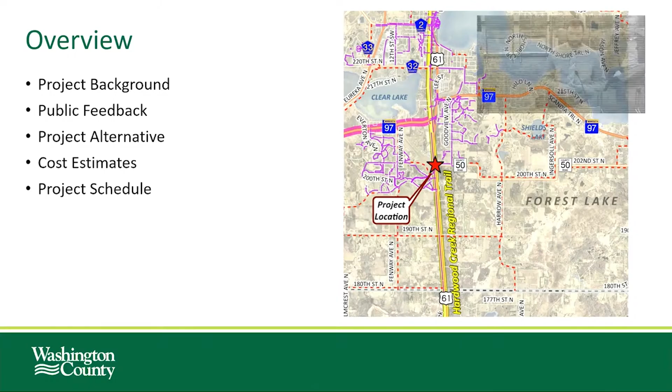On the little star on the map here, County Road 50 is in the southern-ish portion of Forest Lake, just north of Headwaters Parkway and north of the new environmental center there. So that's the intersection at hand.

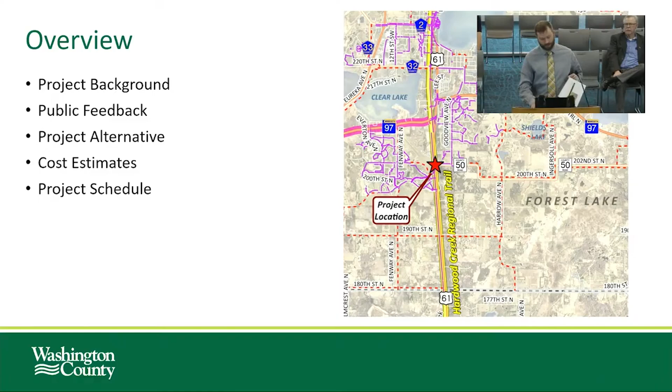Some quick background: Trunk Highway 61 is the main north-south highway here with a 50-mile-an-hour speed limit and high traffic volumes. The intersection is currently side street stop controlled, which can make access onto 61 very difficult, especially for vehicles wishing to make a left onto 61. There's an existing rectangular rapid flashing beacon at the intersection to help facilitate pedestrian crossings, although there's been a history of crashes involving both pedestrians and vehicles when those lights are activated.

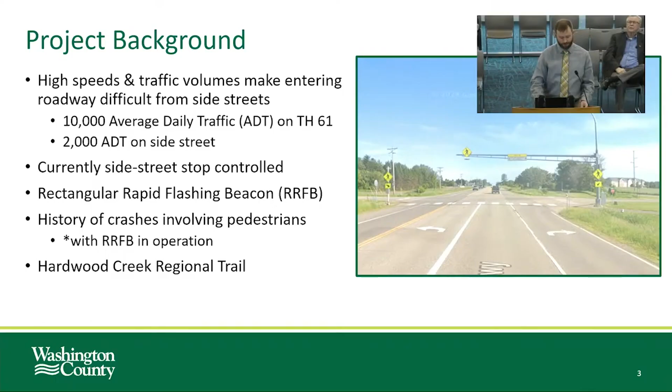The Hardwood Creek Regional Trail is along the west side of the intersection, and that's the county's most visited and well-used regional trail. So it's really a three-way cooperative project with the Minnesota Department of Transportation, City of Forest Lake, and Washington County. As we mentioned last time, we've been busy seeking outside funding opportunities to make these intersections possible. To date, we've secured 2 grants and are working on a 3rd application. Previously, I noted we secured $2.67 million between some regional solicitation funding as well as through MnDOT's local partnership program grant application for improvements on 61.

The 3rd item we're currently seeking is an additional $2 million through the Community Project Funding Program through Congressman Stauber's office. That's the 3rd chunk we're really striving to hopefully secure. Quick project goals: reducing frequency and severity of crashes, providing safe, clear, and accessible crossings for multimodal users, and maintaining acceptable vehicular operations well into the future.

Quick refresher on public engagement: we held our first open house in July and second in September of 2025 down at the Headwaters Parkway Service Center. We had good turnout and received a lot of good feedback both in person and online. What we learned is that 61 is a barrier between the east and west corridors at this intersection. The first open house focused on existing conditions. We heard a lot about the difficulty making left turns, how dangerous pedestrian crossings are even with that rectangular rapid flashing beacon currently there, as well as a lot of excitement for improvements at this intersection.

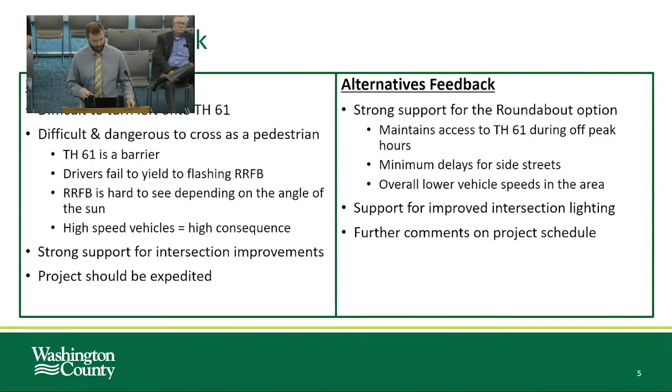In September, we brought forward 2 alternatives between a signal and a roundabout to solicit more public feedback. During this engagement, we heard a lot of support for the roundabout, largely due to its ability to maintain side street access onto 61 during off-peak hours, as well as minimizing vehicle speeds through that intersection for all users, not just the folks that hit those red lights at the signals. So that's what I have for background and public feedback. Any questions from City Council on those two background items?

Hearing none, so with the roundabout addressing the needs of this intersection and being largely supported by the community, the project team developed several options for the roundabout at this intersection.

On the screen here are two same but different layouts. The difference is how that roundabout is centered or structured within the existing trunk right of way. On the left image, the roundabout is shifted to the east, putting part of the circulatory partially outside MnDOT's right of way. But this allows proper approach lengths on the west side of the intersection. The image on the right shifts the roundabout back to center within the MnDOT right of way, which, to maintain appropriate approach lengths, shifts Forest Road to the west slightly as well.

The option on the left results in shorter turn lanes for the future potential public works site on the south side, on the east side of the intersection. It also causes a couple complications with some existing city utilities out there.

Neither of these alternatives are perfect, but one benefit of centering the roundabout is it provides more flexibility to shift the roundabout location north and south to avoid the sanitary sewer crossing, which is key because of the existing grades and size. From the city standpoint, we'd prefer not to impact or realign that. On the east option, the left image, shifting it north is possible, but causes a few more right-of-way impacts, particularly to the northeast corner.

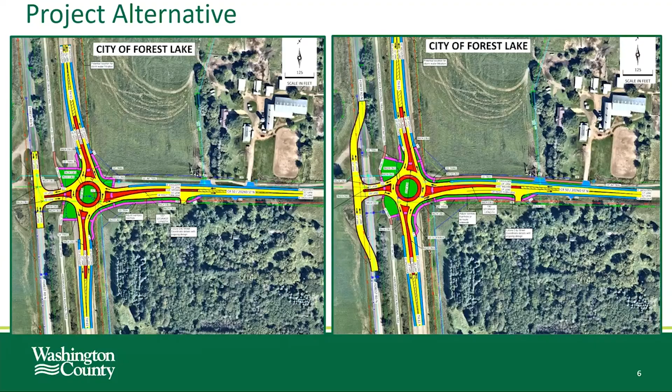Right, the cost for putting the road in, but how does that compare, because we're not spending money on the sewer line underneath the road. If we went with the option on the left, we've got to spend money on the sewer line. Which one's the... Yep, no, I forgot to address that part.

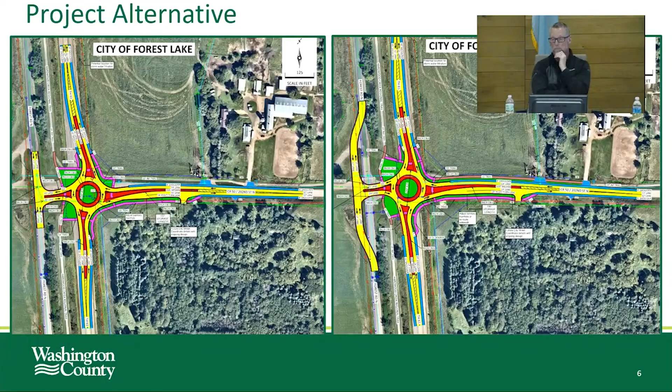So the one on the left with the roundabout shifted to the east, it's hard to see here, but the existing sewer line runs right basically on the south side of that red circle. So it's possible to shift that roundabout north in this scenario, but it creates more right-of-way need in that northeast quadrant. Whereas on the right, when you shift it to the center, you bring the mass of the roundabout towards the center of the right-of-way, so shifting it north to avoid those impacts is less right-of-way takings and less right-of-way impacts. So there's right-of-way needs to reduce or eliminate the sewer crossing.

MnDOT's guidance here has been the city doesn't need to relocate the utilities, assuming you're accepting the risk, and if there's a break or you need to fix it, the repair cost would be on the city, much like it would be today too. Mayor, City Council, just so you're aware, both the sanitary sewer and the water main that run through this and underneath this trunk highway are in existing casing currently. We will probably have to extend that casing in both scenarios, just to make sure we're outside the footprint of the roadway. That's a requirement MnDOT has always required. Plus, if something were to be bad with the pipe, then we can go fix it trenchless, right? We can get in and out of that casing on both sides with pits if we really, really had to.

So with that being said, the concept on the right takes the center of the roundabout north of the sanitary sewer, but then we still have that water main. We'd have some minor relocation to do too. But the thing about that sanitary sewer, we consider that trunk line. That's a 24-inch sewer line that's at minimum grade. To relocate that, we're chasing that a lot longer than this project, right? Because the grade is less than 0.5%.

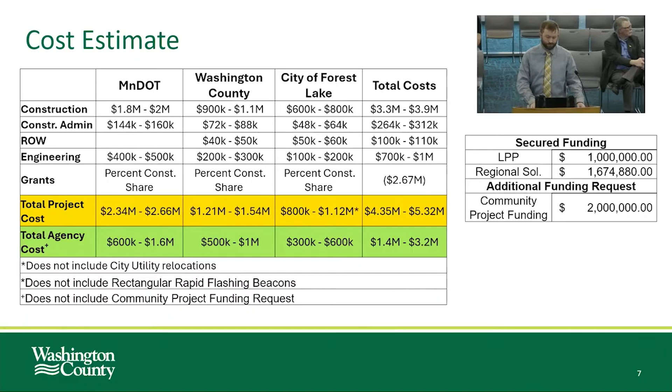Does staff have a recommendation yet on this part of it?

I was just trying to add up the math with how many times that other one got hit. I'm halfway through, from 22 up until now, I haven't finished yet, I have 8 different times so far, and about $30,000 worth of damage. And that's not including Public Works when they go out and fix it. This is just contractor work when it gets into full poles knocked down or electrical work.

So is it $30,000 per occurrence or total? Total, so it's about between $2,500 and $3,300 per time when one gets knocked down and they have to rewire and set a pole. There's one that's about $9,000, I think that's when we couldn't just put the pole that got knocked down back up. I think we had to buy a whole new pole.

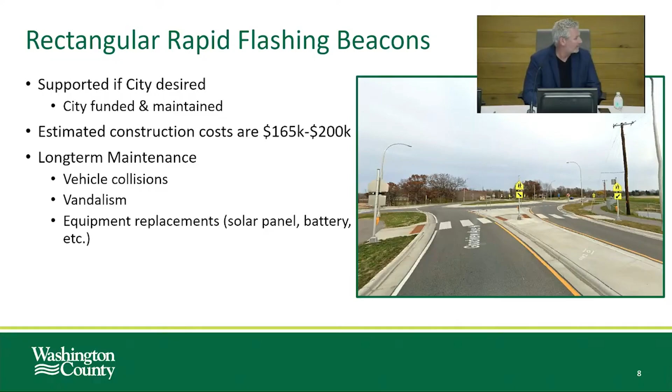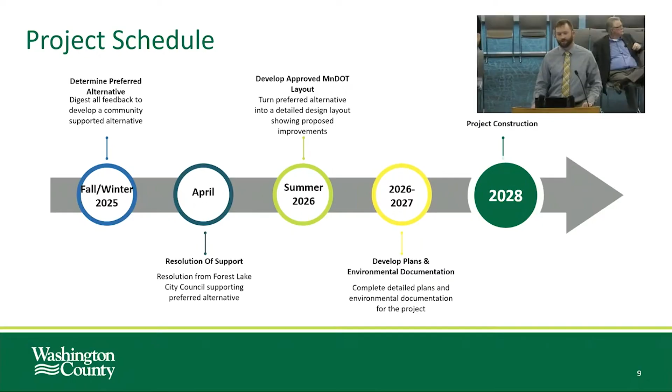Okay, real quick, just a reminder on the project schedule. Tonight, no action, but really what we're looking for is just a resolution of support for the project. As Ryan Goodman pointed out, it allows us to move forward with this roundabout design, but it doesn't necessarily lock in - we don't need to lock in these RRFBs right now. Some of the finer details can still get worked out over the next year and a half, but it allows us to take that next step forward, knowing all agencies are on the same page in terms of our alternatives.

Hopefully this summer we'll develop a level 2 layout, basically a 60% design on a big piece of paper you've probably seen before. Then we'd work through final plan development through 2026 and 2027. This is federally funded, so we have a lengthy environmental process that takes 6 to 8 months for some agencies to get back to us with their reviews - so there's a timeline constraint there. But we've got some time here for planned construction in 2028.

So otherwise, that was it - that's all I had. So I guess any questions, thoughts, departing words for us to take back?

Maybe highlight some of the positives - cost, maybe safety isn't as much of a concern on these roundabouts as a traditional intersection with signals - that led us to get here. I'm trying to remember that conversation, but if there are some highlights you could point out as to why. I agree with Councilmember Miller that it looks intimidating with all those crossings, but clearly the county has - this is the plan. You're doing more and more roundabouts than signaled intersections, correct?

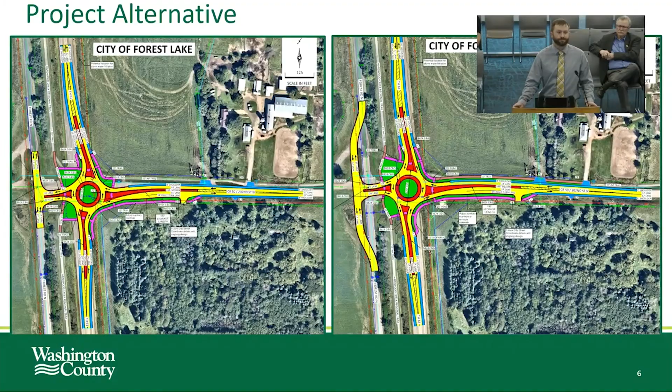Yeah, well, it's definitely needed. I mean, with all the housing that's coming in there and the developing we're planning on, it just scares me.

Any other questions or thoughts? Councilmember Miller, just to expand on that, the county just solicited proposals for the corridor study for County Road 50. So there'll be a lot of that kind of stuff looked at as part of that study with the growth in that area. Okay, thank you.

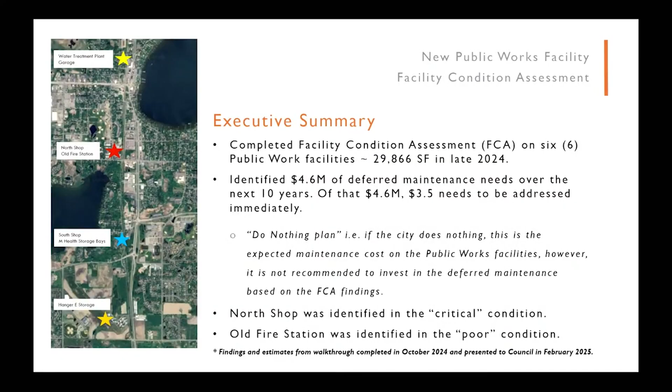Thanks, Jonathan. Mayor, council members, thanks for having me tonight. Just to give you a high-level overview, these were the findings from the facility condition assessment done in late 2024, and then approximately a year ago I had a working session and ultimate follow-up on the findings from that study last February. As you know, the Public Works facility is spread out currently across 6 different facilities at 4 different locations. Ultimately, through the do-nothing plan or deferred maintenance plan, there was over 4.6 million in deferred maintenance needs.

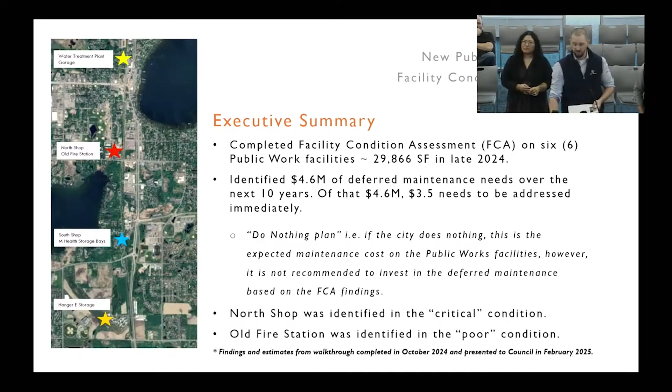When we talk about a facility condition index or how we score these, this isn't an index developed by KA - this is a nationally recognized index that you grade facilities with, the deferred maintenance costs over the replacement costs of a given facility.

Here's a breakdown of what that 4.6 million looked like across all of those projects. Ultimately, when you see in the red there for the North Shop and the old fire department, which makes up the bulk of your square footage of your existing facilities today, you're in both critical and poor conditions, which then is a recommendation to divest.

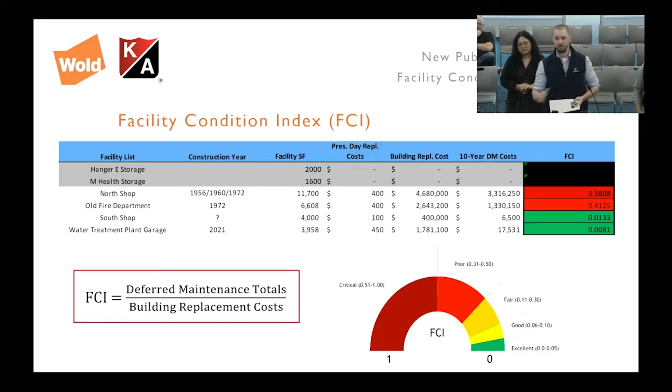It's easier to replace the facility than it is to try to go in and do the repairs that are needed. It's also important to note that in a facility condition assessment, you're not looking at adequacy - you're looking for that like-for-like replacement within those facilities.

So that is a high-level recap of the facility condition assessment, unless there's questions. Otherwise, I'm going to give it back to Wold, and we're going to talk through space programming.

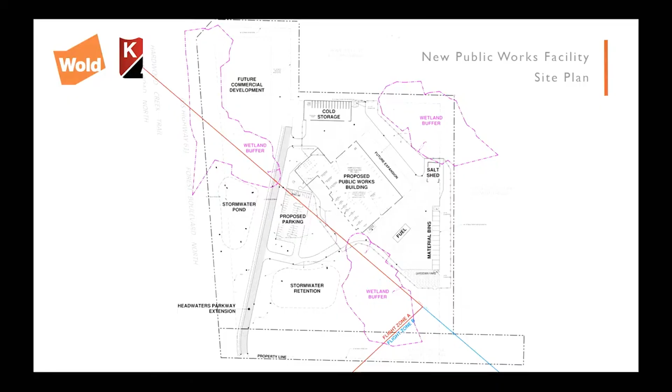So I'll do a quick run through of the progress and where we've landed with SD. Obviously we are just at the first stage of design, so none of this is set in stone. It's all malleable, but with the feedback of the core group, this is kind of where we're at this point.

From a site plan perspective, here's the new proposed public works facility. We'll go more in depth on the floor plan in the next couple slides, but we are contending with, if you remember, the airport flight zone restriction. That's this red triangle here. Essentially we cannot locate the building in that footprint, so we are trying to stay outside of that zone.

Another restriction around the site are the wetlands that exist there today, shown dashed in this magenta color. Working around those, we've established the Headwaters Parkway extension on the west side of the site. To maximize efficiency, we're looking at splitting the stormwater retention, sized for what we're calling the future commercial development at the northwest corner. We've left a zone available there, and also a future connection up to the road to the north.

Off of Headwaters Parkway, we've got the proposed parking lot for both public and staff vehicles. Circulating into the site on the north end, we've got the cold storage building. We've dedicated a zone for future expansion. Obviously that's left unbuilt for now, but just to make sure we're not locking you in long-term to something that's not usable or can't be modified in the future.

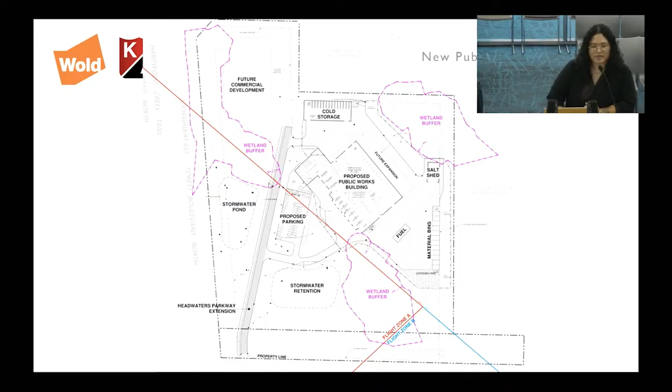As we dive in closer to the site plan, I've got zoomed in views for each of these, but overall we're looking at the north side of the building being our main office area, knowing that has more prominence, closer to the street, trying to give an attractive view for those driving by. Further south along the front, we've got the division workshops and maintenance bays, and the largest portion of the building is the vehicle storage, our garage and vehicle parking component. We're also looking at a mezzanine space for added mechanical and storage over a portion of the offices off the mechanics bay and over a portion of the parking spaces.

The office area has two separate entries planned: a public entry on the northwest side of the building, and a staff entry for ease of access as they come in daily. Off of the main lobby, we are looking at a training room. Feedback from our steering committee prioritized that as a public component or amenity that other city staff or the public could utilize. There is a functional component too, making sure it's usable as a break room for public works staff, accessible conveniently from their primary work area.

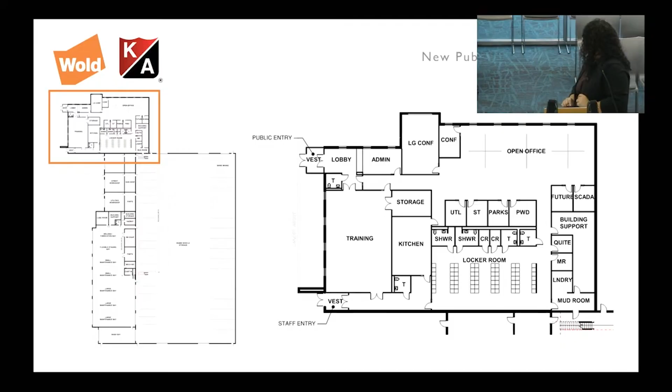And then what is the total square footage of this part of the building? I don't have that, do you have that? The office area is around 11,000 square feet.

Yeah, and I'll say, from that 11,000 square feet, I think some folks from the steering committee have seen this, that over the course of time we've actually cut quite a bit out of this space. We originally had a separate training room and a lunchroom and break room space too, and there are other areas where we've trimmed down, in that locker room area as well. But I'd say sharing that kind of cafeteria and training room space was a big shift that got us down quite a bit in terms of square footage. So I wouldn't necessarily go through all the ins and outs of that, but it's probably important to know that, with the support of the steering committee and staff, we're able to continue to look at ways to get this done efficiently. Thanks.

Mr. Mayor, yeah, Kevin, City Council. So I know we don't have any women staff right now, no women employees right now in Public Works. How would you, in the future, let's say we have all of a sudden 3 or 4 ladies, how would we divide those showers in that locker room to accommodate them?

I guess we don't often see that they're necessarily assigned. Those are all individual occupant rooms, so as people need them, if you need to jump in the shower, you would just go in whichever one is open or available. Sure, but if you're changing your clothes, are you standing in the shower or are you standing out in the locker room? Oh, we've got changing rooms included in here, so there's 2 shower rooms, 2 changing rooms, which is essentially just a bench, a glorified closet space essentially, and then a couple of toilet rooms.

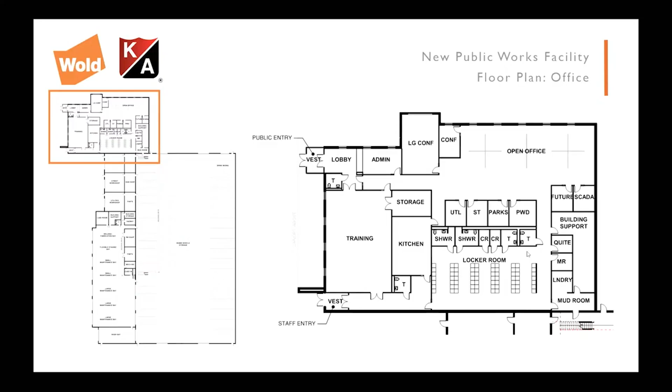Yeah, maybe, I don't know if we can zoom in on that. Is this a PowerPoint or a PDF? I can see them fine. Just to note, if you look at above the R, that's where the actual shower is. And then the rest of that space is like, this is a single-use space, so there's a large area to change. There's still a bathroom and a toilet.

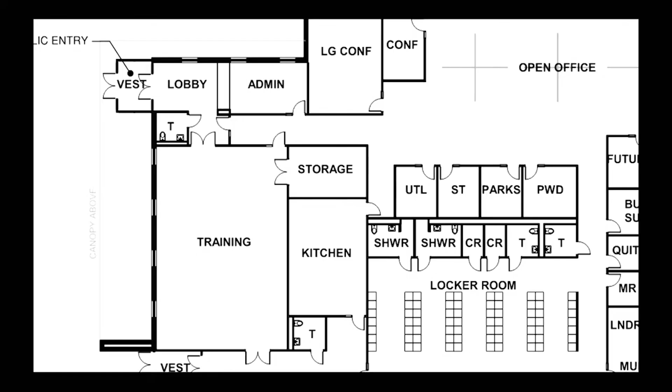So these are all individual use spaces. And that's sort of the benefit of doing it this way - people store their stuff in their individual lockers out there, but they're really changing, showering, going to the bathroom in those single-use spaces.

I've seen it where oftentimes females feel more comfortable if something's assigned, and there's nothing stopping Public Works from saying this left one is for females only. I'd say there's still adequate space for the men to use the rest of those facilities without feeling like they're stacking up on each other.

So as of right now, it's meant to be flexible for those changes in staff. I think 25, 30, 35, 40 years ago, Public Works employees would come in their street clothes, change into their work clothes, work, then change back. That's kind of changed as time has gone on.

Most of my staff just show up ready to work, and when they leave, they go home in those clothes. So this is more of a locker room where you have rain jackets, snow pants, or Carhartts, where you're coming in to change into something different, or if you get soaked doing a job, you can change out.

Having that open locker room is more efficient, because if you have 2 separate locker rooms, a men's and a women's, right now you have more men than women, but you might have a time where you have more women than men, and suddenly you have a whole room that's just empty. This one will flux with men or women - it really doesn't matter the count.

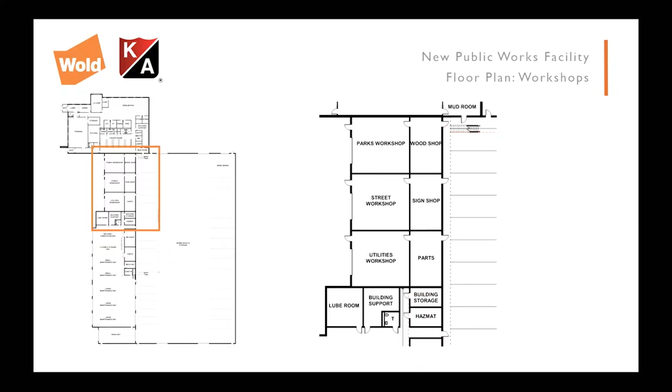All right, so as we move further south, we are going into division workshops - essentially a working area, a garage stall with space for part storage and tool storage for each of the divisions, so they can work outside of the mechanics area safely on whatever projects they have going on.

We've also made this multi-use and located some of the shared amenities. They're co-located with the shops that use them the most, but really the wood shop, sign shop, and parts are all a shared amenity across all divisions. So we're trying to locate those close to the mechanics area and also close to the office so they're accessible by staff, but they're more of a functional space outside of the office zone.

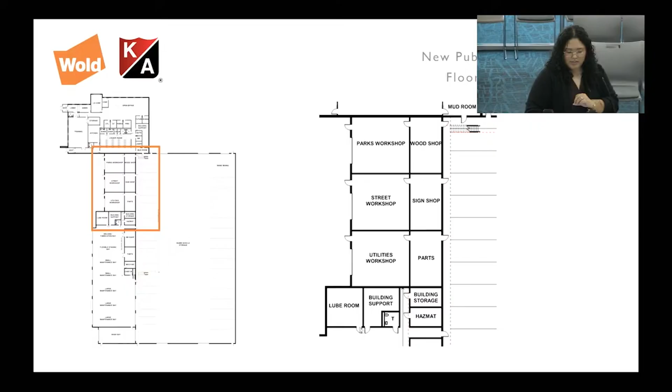As we move south, we'll start transitioning into the mechanics area. We've got the lube room with all the fluids and storage tanks that will disperse out through the mechanics bay. We've also got general building storage, hazardous material storage, and more building support, mechanical and electrical, that can certainly start to trim up as we get further into design.

As we keep moving south, those open into our large open mechanics area. We started with initial programming of having 2 small maintenance bays with another small flexible staging bay of a similar size. At the very north end, we've got our welding and fabrication bay assigned there, and the flex and staging bay.

The intent of that flex bay is, if you've got a project and maybe you're waiting on a part for a while, it doesn't take up a whole operating bay. You've got flexibility to leave that there, not have to tow it elsewhere off site until that part shows up, or if something comes up last minute, you've always got a bay open there.

And then we've also got 3 large maintenance bays - those are drive-through, or have the ability to drive through into the main vehicle garage. The last stall here at the south is the wash bay, which similarly you can drive through from the exterior into the interior.

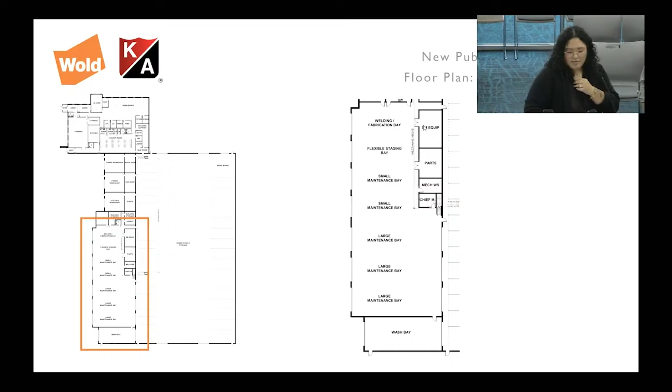Off of those small maintenance bays, we've got some of the supporting small equipment areas, parts storage, and then the mechanics offices, so they've got direct view into the maintenance bays.

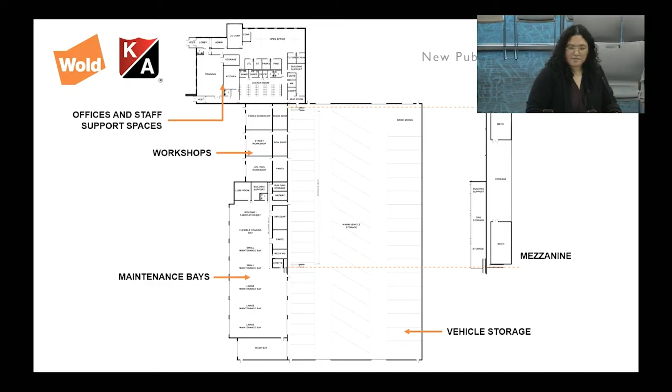And then, I'll go back one. The last remaining area is just vehicle storage. So we're looking at 2 main drive lanes through. In the center row, we've got oversized vehicle parking, so they can drive through, pulling in and pulling out as you move north. And then spots for smaller trucks or pickups on the east and west sides of the garage area. Any questions on the floor plan before I keep moving forward?

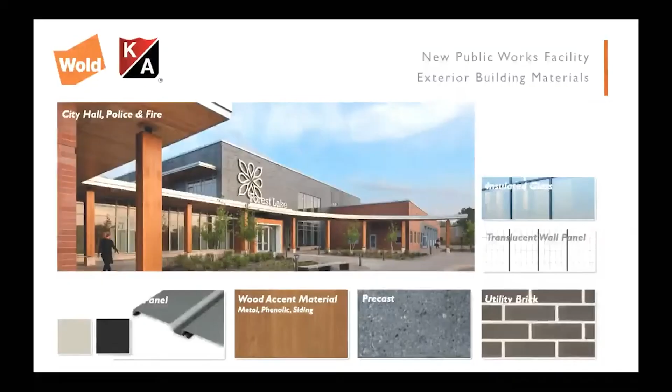No? Okay. So we are in schematic design, but we have started looking at some thoughts around materials, massing, what this starts to look like. We're very early on, so this is all subject to feedback, but we've gotten feedback from the steering committee on looking at this building here as kind of a baseline of inspiration for materials, trying to create a cohesive kind of identity around municipal buildings.

Obviously, with public works, it's a very hard environment, so we want to make sure we're looking at really durable materials, but also still want to maintain an attractive front, right, if we are receiving public here for training or services. So we are looking at precast as the main structural component. It's really durable, long-term, and then also looking at how we can accent that in certain key areas with metal panel, wood look material, brick, and different glazing components that we can install around the building to prioritize daylight to these spaces as well.

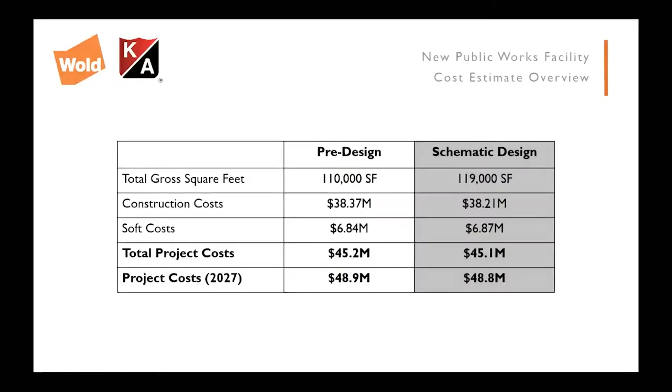Further down, we have escalation factored out year by year. 2027 should be highlighted in a darker color, which is where you get to the 48.9 million and 48.8 million. Escalation, as a rule of thumb in the industry, is based on pricing to the midpoint of the project—so we price it in today's dollars and escalate based on when construction is actually going to take place, using a factor of 4% per year until you reach the midpoint. It's just a general rule of thumb as we go through this.

Jonathan hit the nail on the head. When you look at pre-design to schematic design, while the building increased in square footage, there was a trade-off—more expensive square footage was reduced in favor of less expensive square footage, like reduced office space and increased vehicle storage and maintenance space. Another big factor was the reduction in site costs. At the pre-design stage with high-level concepts, you don't have the level of detail you saw today; you're going more on historical data and what these facilities typically run.

What I'll point out is that at schematic design, not only did we do our own internal in-house estimating for every component of the project, but consultants under the design team also looked at the site. We then took all the critical pieces of the project and put this out to over 15 different contractors who provided input on the unit pricing you see here today. I mention that so you can have confidence in the pricing we're reviewing together.

From a schematic design standpoint, the really good news is that we were right on track with where we projected things to be from pre-design, even with the square footage increase you saw here, which is just something that happens as you go through the iterations of design.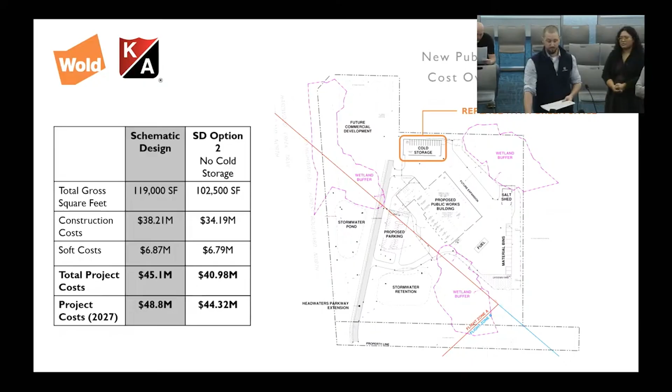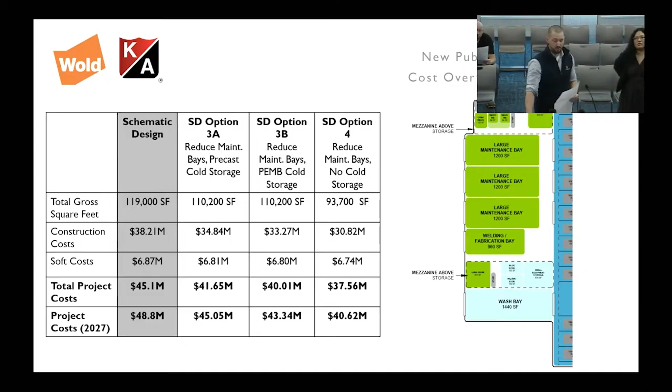We're going to go down, and feel free to tell us to hit pause here if there are questions on any of these. Then we're going to go into multiple different variations for option 3. This is a reduction in maintenance bays, reduced by roughly half. I know we've had those conversations on what that means in prior sessions, but if there's a desire to recap that, we certainly can.

I'll just say the biggest factor there is an agreement to not maintain all city fleet. This building would just be for public works then—so instead of taking on fire, police, and others, it's essentially just public works. That allows you to probably maintain the current staff, or thereabouts, that you have.

But have adequate maintenance bays for the vehicles that you'll continue to maintain throughout the years. So if you take that as a given across option 3, the difference lies in the cold storage.

3A is a precast cold storage, which is in alignment with your building ordinances. Option 3B uses PEMB, which stands for pre-engineered metal building. I believe that would require a variance with the city in order to construct, but we wanted to provide that as an option for you to consider, just because of the reduction in cost you can see from precast to a pre-engineered metal building based on the sizing.

Ultimately, option 4 here is not only a reduction in the maintenance bays, but it's also removing the cold storage in its entirety, which gets you down to roughly 40.62 million. And yeah, I think that's the rest on here.

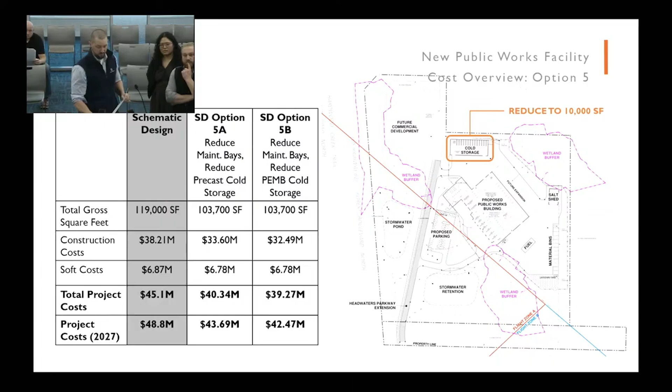I'll say the difficulty in a 2-story option is adding square footage, because you've got essentially stairs and elevators that you have to add. So while you can reduce some of your exterior shell costs, roofing and exterior walls, a lot of the foundation costs, elevators, and stairs often offset that.

When we're in the pre-design phase, usually if there's a question of whether to do 2-story or single-story, we don't usually view that as a big cost difference.

It's not until you really start to get further into the design that you understand whether or not there would be implications depending on the site adequacy or adjacencies, and whether or not you could even have a stair in a certain design. So right now, we're suggesting there's probably not a huge delta if we go to a 2-story solution.

Then to go to the next piece, looking at just a squared-off building that was all single-story, I'll say we didn't really have anything to go off of there, only because we didn't redesign the building and all the adjacencies that the office space took.

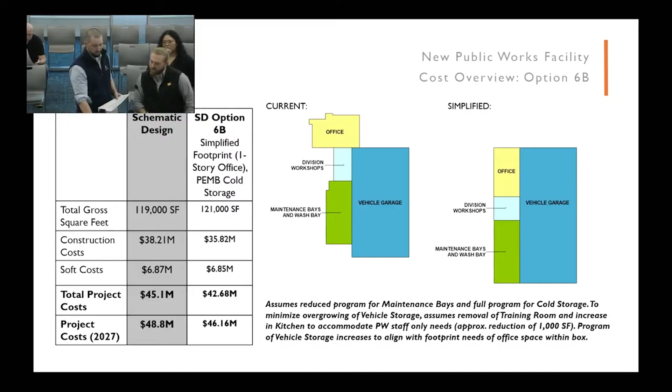Jonathan, how much square footage are we losing on the office and the division workshops on the right-hand side of the simplified one? Do you have an idea? No, if you look at the diagram we have, it's actually 121,000 square feet versus 119, because we essentially just took the boxes we had and squared them off without trying to cut back. So we actually grew a little bit to do that.

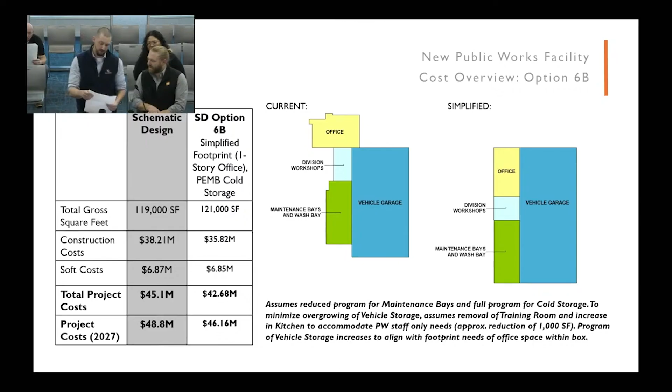I got a takeoff right here, Jonathan. It was roughly about just shy of 1,000 square feet, it looks like.

And vehicle storage then increased by close to 10,000. Yeah, in order to get the box, if you look at the footnotes at the bottom, like maximizing the vehicle storage and trying to square it off, you really kind of lose that training room. That's kind of what we assumed would have to go to be able to get all the components to fit with the puzzle pieces that we currently have, right?

Still add some features that make it look cosmetically appealing, but with potentially some savings with not having, to your point, an appendage separate with this office space. This is the first time I'm seeing this feedback to the question. I don't know if it would necessarily have to be a square box, but if that office space as it sits now could be more of a tilt-up type construction design as opposed to brick and mortar, if there's some savings there at all.

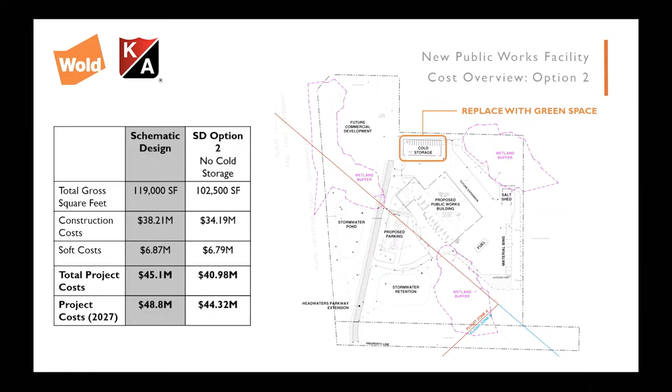But do you really want a metal building across from a future site? No, there's a newer building at 97 in Forest Road — they have cabinets or countertop finish, so to look at it, it doesn't look like a typical steel building. It's really nicely done. Either way, with precast but no FF&E, that's $250 a square foot for a warehouse. That just does not align in the private sector. If I'm doing the math right, $4 million at 16,000 square feet is like $250 a square foot. I don't know how that adds up.

I should mention, at 16,000 square feet there is a requirement to have it sprinklered for the S2 building type, I believe. That influenced what we looked at for option 5, reducing that square footage — if we go below 10,000 square feet, we don't need to do that sprinklering. So that's maybe a complicating factor too in the cold storage.

Very similar to precast, there are about 4 or 5 different pre-engineered metal building types out there, and usually in the metro there are about 3 to 4 installers that tend to bid on that work. I'd go back to Rosemount — I'm almost 100% positive that's a pre-engineered metal building they use for their outdoor cold storage. Some of it is how you do the detailing: are you doing metal panels all the way down to grade, or staying up above with concrete 4 or 5 feet for maintenance and durability? There are all sorts of things that can be looked at.

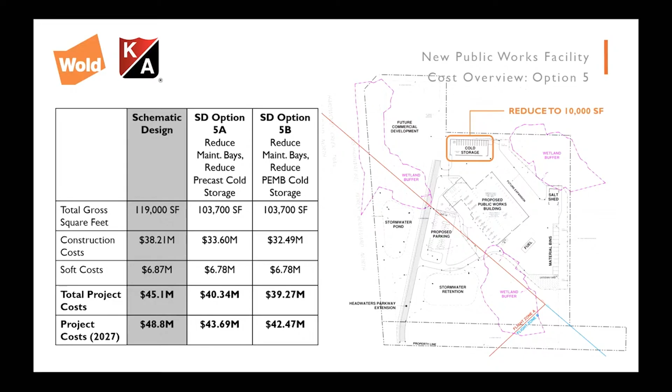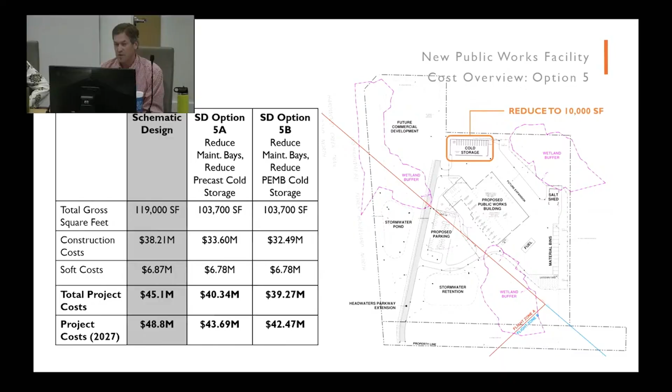I think a lot - I have to remember back - but I think that 16,000, a lot of it was, you know, even putting trailers and stuff in there. I think if you reduce that and just strictly put the equipment in there, I think you can always get creative with what you put in there. It's valuable to get everything in one spot, and then you can get rid of all these other spots too.

So I think staff would be happy with 10,000 versus 16,000. Yeah, yeah, that too. I don't think so. Okay, we think you're at 7,600 right now.

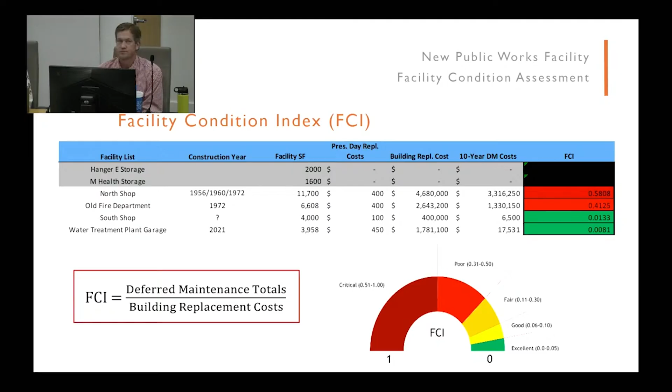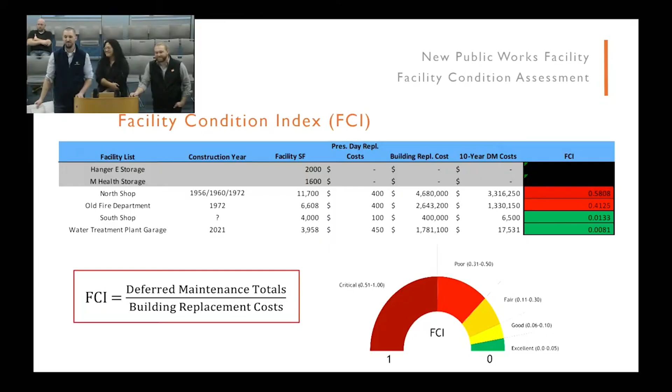If you take the hangar, M-Health, and the south shop - 7,600 square feet - plus a little bit of the water treatment, but not too much. Don't forget Dave's garage. So you're still getting some increase to that.

And I should say that doesn't account for, like Dave mentioned, all the ancillary sites - random water tower, things like that.

So the goal tonight - I mean, is this kind of a blessing, or what is the idea here? To sign off on schematic design, not ask for some more? Like, what is the goal tonight, or what's the plan?

I mean, either consensus that you like one of these options and a blessing on that to basically approve the schematic design, or direction of we want Wold, KA staff, steering committee to go back and do something - whether it's a price point, or we want to see a building that's boxed off or in a rectangle shape, or we really want to see something different. So either we want to go forward with one of these options, or we want this group to go back with direction on how to change these and come up with a new option.

Basically saying we don't want any of these options, we want a new option that is A, B, C, and D - either a set price, a set design, less square footage, something.

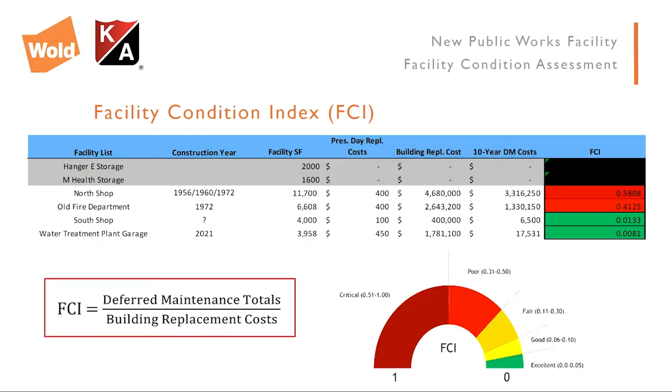Sorry, you were asking what's the current need for square footage? Oh, the current need, the difference, and what that price would be. Yeah, I think the difference was only maybe like 20,000 square feet, and it had more to do with vehicle storage than office space, because the office space, you're only going to add a couple people maybe, so that was a pretty small component of that increase in square footage over the course of 20 years.

It was more about, as we start to buy more vehicles and try to maintain a larger footprint of roadways and things like that, that increase was more to do with the vehicle storage than anything else. $4 million.

I don't know, Jolene, maybe this is a question for you. We know we have really no answers with the local sales tax option. I mean, I really do think, for me personally, the ability to get that probably, and I'm not saying this is right or wrong, but it weighs into this because it is just less impact on the taxpayers.

Correct, and we're not going to have answers on that. We've got to get through the first hurdle first, which is legislative approval. Hopefully, fingers crossed, there can be some progress at the legislature this year, and they can have a decision on all of those requests from different municipalities or governments on those sales tax requests in May. If they are kind of deadlocked and have to call a special session, so we're looking at July. That's the first hurdle. The second hurdle is having this on a ballot in November, and that's really the big hurdle.

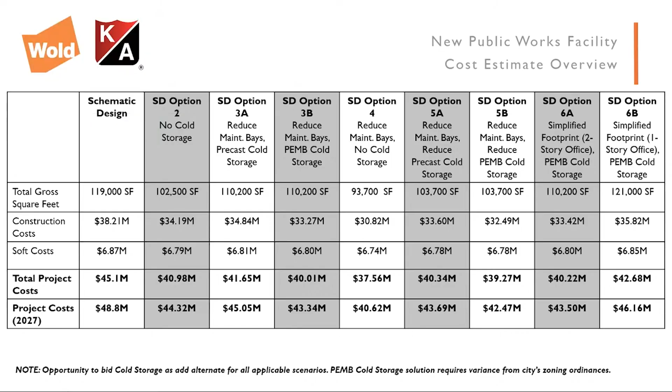Yeah, I mean, I'm happy to see some consensus there, and I think it's something we can work towards. I guess the question is, as we look to what's next here, would you like us to find a sweet spot to wrap up schematic design that hits below 40 million? Because I think some of the things we're talking about in terms of savings have a lot to do with materiality and more specific building construction pieces that really has to go into design development and getting deeper into it, not just looking at a floor plan and some diagrammatic stuff.

So I think in one way, we can keep dragging it out and figuring this out and see if we can get there with maybe the steering committee and core planning group. But in another way, we could also just come back to a formal council meeting and say, we know what the direction is and we're ready to move forward into design development, and that's going to be the target.

Yeah, I mean, just remind everyone that this part of it is $330,000. A lot of money. And so I think we need to get as comfortable as possible with this piece before moving forward. So I think coming back to exactly what Jolene just listed there on some of those things, at least another shot at that has to happen.

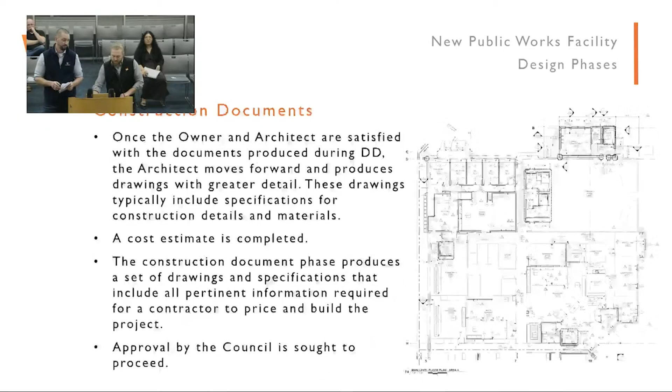So then I'll jump to the very end. I think the first action item, recommendation of project scope, I think we have that. I didn't write in there budget, but I think we have both of those and we're pretty close now. Beyond there, there's a couple other steps that I think should be discussed.

One of those is, like I said, proceed with design development. You have our proposal that's based on essentially 3B, which is the core planning group recommendation. I don't think we necessarily have to talk about that anymore today because that'll just adjust as we dial in on where we want to be. But the last one is project delivery method and really starting to think critically about how you want to move forward with construction. If we're taking a month to smooth things out here, that would really be the time to make this decision, because you wouldn't want to go into design development not knowing if there's a construction partner and who.

And then there's this fourth piece of the community engagement strategies. I think today was one effort, but there's certainly other things that can be contemplated, and I think Kraus-Anderson's got a couple of tools. We have some too, and it's just a matter of how much you want to hear about that or try to hit that head on.

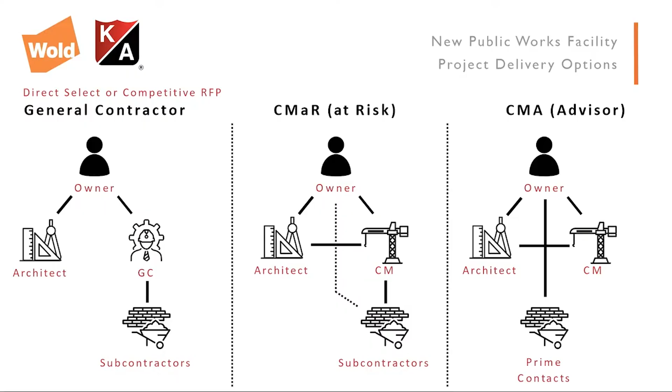I think one other thing to pay attention to, not to get too in the weeds, but between general contractor and either CMA or CMAR, is the line between the architect and the construction manager. It's super beneficial to have the construction manager working with the architect as you're going through design development because you eliminate those holes in your project. The architect is designing a building, but a construction manager is also looking at the plans and going, okay, there's a dead space here, we're missing something here, or why isn't there something here? So when you get 100% construction plans, if you have the architect and a construction manager both looking at it, your contingency probably is gonna fall down even more, because you've probably found a lot of the gaps in your project.

Whereas with a general contractor, Jonathan wanted to design it, and then all of a sudden you hire Dustin and he builds it, and he'll go, well, I can't build that, that wall is supposed to be 6 inches this way, and then there's a change order, and I can't do this because that's there's another change order. So regardless of whether you do CMAR or CMA, having that construction manager on board as you're going through design development and putting together construction plans is just valuable, because you're gonna have a very good set of plans, since the construction manager is gonna be just as involved in those construction plans as the architect, because they're gonna know what they're looking for and how that building's gonna be built.

I guess I would caution that if you're going into design development, the sooner you can bring on your construction manager, the better, just like they're assisting with schematic design. If Jonathan was just doing this without Kraus-Anderson assisting in schematic design, you'd probably be missing some of these costs, or they're the ones helping with certain design aspects. So just my 2 cents on that, if you're gonna go down that road, when he said 2 to 3 months, I think if you decide to do design development, you'd want to decide which direction you're going with this as well and set that in motion.

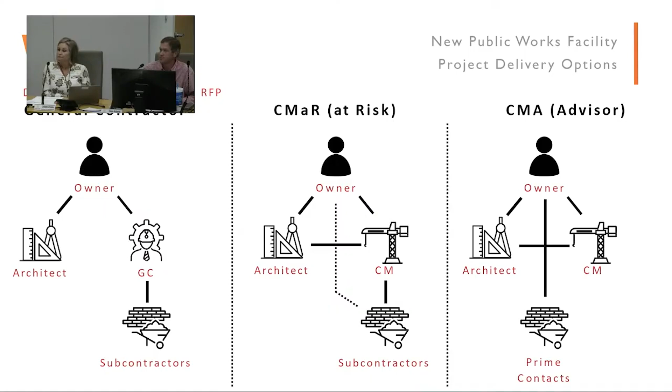Other questions on this for now? I do have one question. I'm confused, sorry - no, you're fine. When I was building and developing, it was residential.

At the CMaR, when the subcontractors - when the owner sends it out for bid, do you have your choice on subcontractors on that, or not? It's actually a two-step process to go out for bids, council members. In CM at risk, you have to do a pre-qualification of contractors. Usually around design development, once the plans or specs are developed enough at the end of design development, you go out for that.

At that point, you have to set a list of pre-qualification criteria. Your construction management firm will usually have a pre-qualification booklet that contractors send in. Does the city have input on that? The city does - we've worked with multiple cities, some want heavy input into that, and some don't want to touch it. It's truthfully a matter of what you want to do and whatever level of involvement you want to have.

But you have to go through pre-qualification - that takes roughly two months. What ends up happening is you solicit out general information about the project, and contractors have to submit their qualification data. Any contractor that qualifies can bid on the project. So they submit their data, we go through it as a construction management firm, bring it back to you - here's who qualified, here's who didn't. You ultimately approve that list, and that list is what ultimately bids on the project at the end of the construction documents. So it is a little more involved.